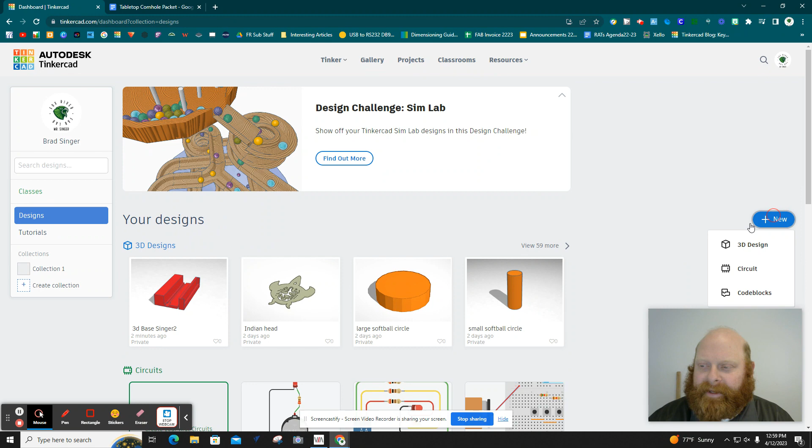So let's go ahead and click on Tinkercad. We're going to go to Designs, and I'm going to click New 3D Design. Then what I'm going to want you to do is make sure everything is set up correctly. I'm going to move myself out of the way here. We're going to change the weird name that it gives us, and we're going to say Tabletop Cornhole Set, and then your last name.

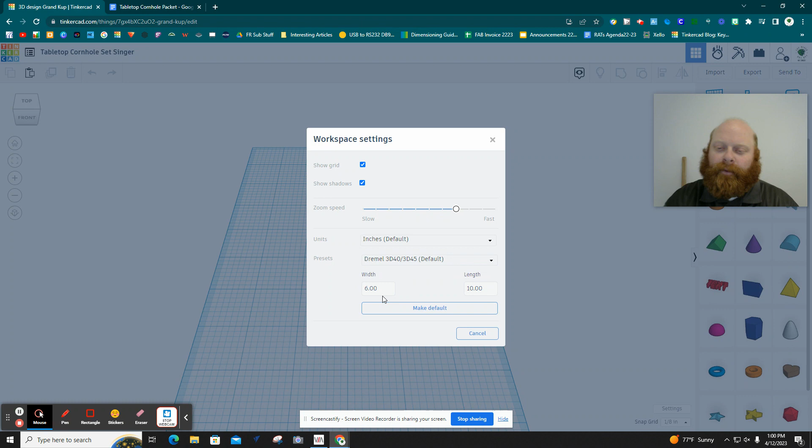Next, we're going to go to settings. I have everything already set this way, but you're going to have to change it probably. Change units to inches, change presets to Dremel 3D40 and 3D45, and then click Make Default. When you click off the screen, it will look like this. And then make sure our snap grid is at 1/8 of an inch.

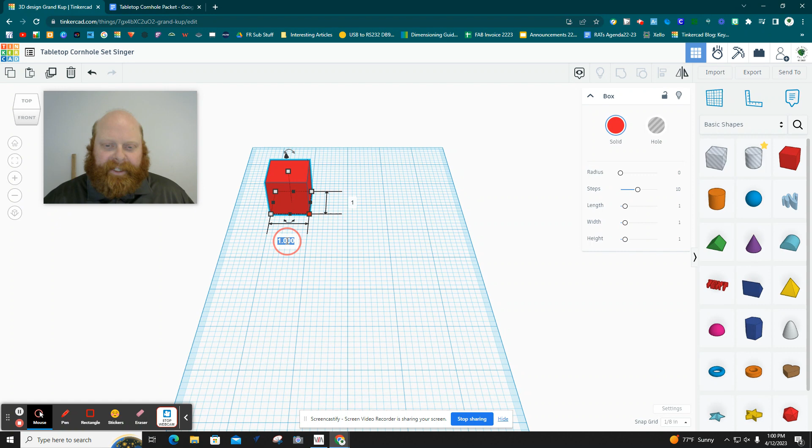Okay, I'm going to move my camera over a little bit. First thing we're going to do is make the tops. These are going to be exactly the same dimensions as the wood you're going to use. So I'm going to click in the little node, bottom node corner here, and we're going to make the dimensions match our top piece, which is 6 by 8. I'll click the little node, click this button, type 6 on the keyboard, click Tab, click 8, then Enter. This will make a nice long piece for us.

It defaults to 1 inch tall, but we want 1/8 of an inch - that's how thick our plywood is going to be. 1/8 as a decimal is 0.125. There we go.

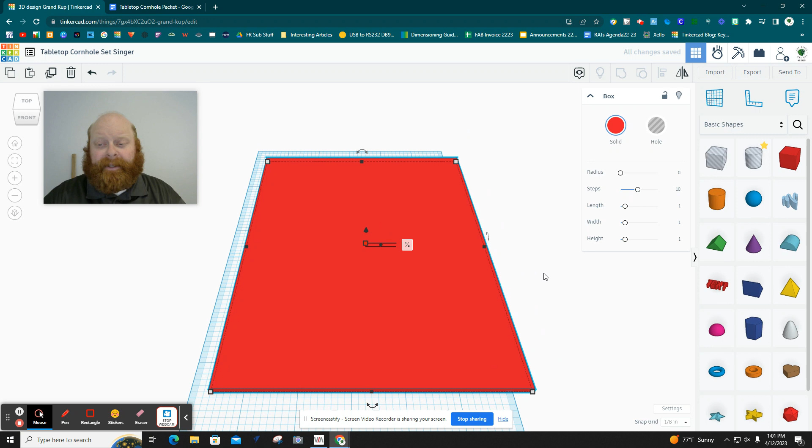Nice flat piece. For the cornhole, you take the bags and toss them right into the hole. So what we need to do is make a hole. We're going to bring the cylinder out. It doesn't matter where you put it, just as long as it's somewhere on the red piece that you made. Speaking of red, let's say I want to change that color.

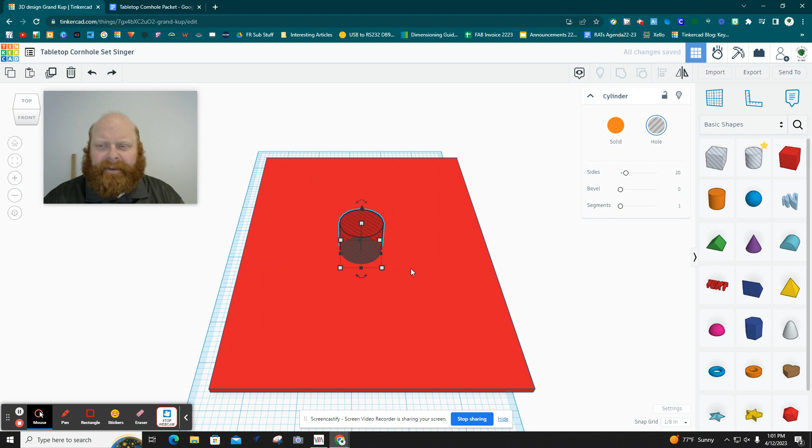I want to go ahead and change it to green. I like green better. So it doesn't matter, I just like to change those every now and then.

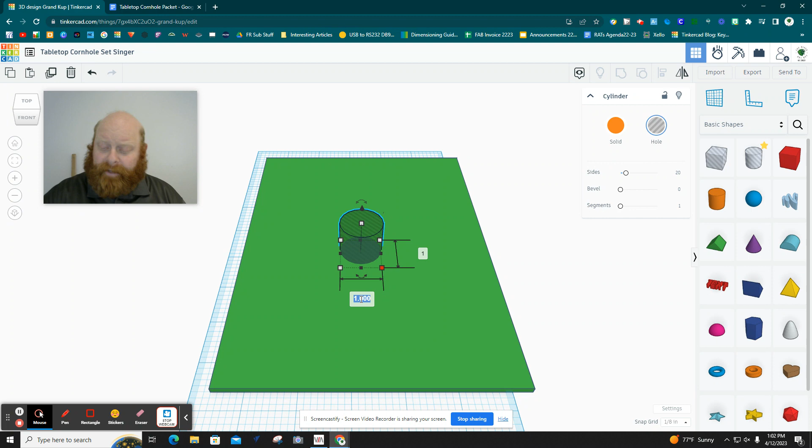Okay, we're going to go to our nodes. For our nodes, we're going to want to make our hole a diameter of 3.25 inch wide. Actually, let's do 3.5, okay, so it's easier math. So 3.5, click Tab, and 3.5, and click Enter. That's our hole - that's how big the hole is going to be.

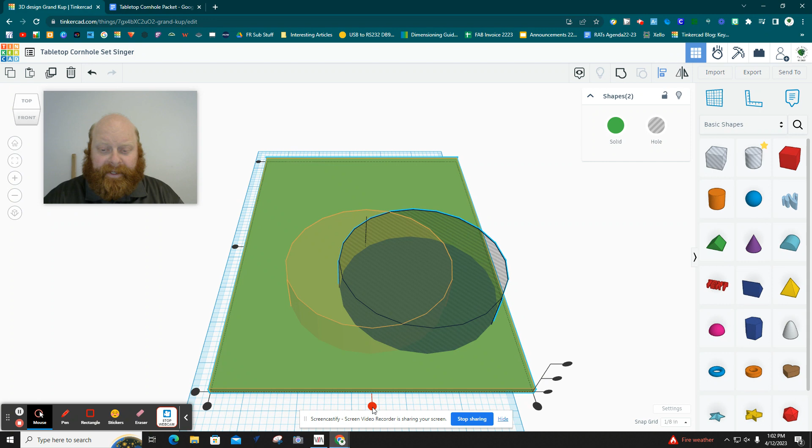It doesn't matter where it's located because we're going to use an align button. So we're going to highlight with our mouse the two pieces, and click L on the keyboard. Now you see these little dots. Let's pick the center one so it centers the hole, and then pick this back one so it sets the hole all the way - let me zoom back out - all the way to the back of our board. We'll click on top. Okay, so we can click off.

Now what we're going to do is move that hole down an inch. Here's how we do that so we know it's precise. Down here, the snap grid says 1/8 of an inch, so what that means is we're going to need to move this eight eighths to make one inch.

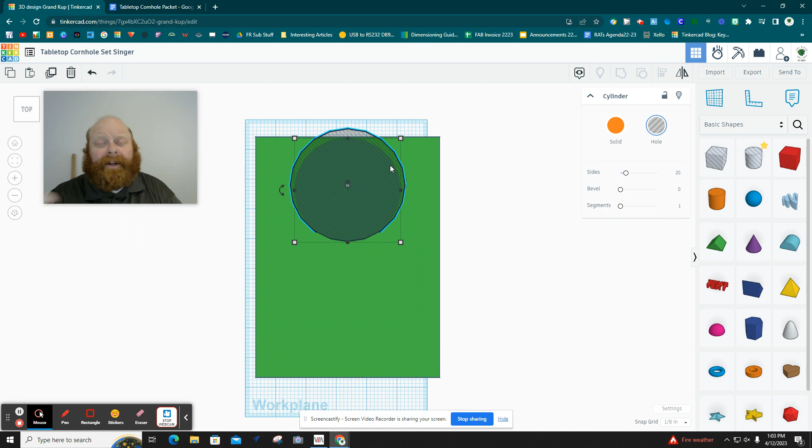Our denominator is 8 in the fraction, so that's how many times we have to use the numerator to get an inch, so that's 8 times. We're going to click the arrow down 8 times. 1, 2, 3, 4, 5, 6, 7, 8.

Now our hole is centered. It's down 1 inch, exactly where we want it to be. So what we need to do is cut this hole out.

So we're going to group it. That's how you do that with the CAD program. We highlight both parts, and we're going to either click this button here that says group, or you can do Control G on your keyboard, and there you go.

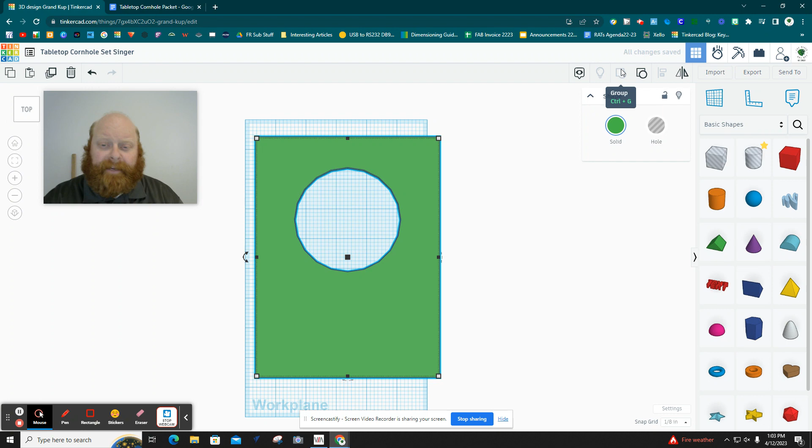There's our hole. If we check our dimensions, we can click in the corner. We'll see here if I do it at an angle, 6 inches, 8 inches, and 1/4 of an inch tall. Perfect. Now we've got to make the base.

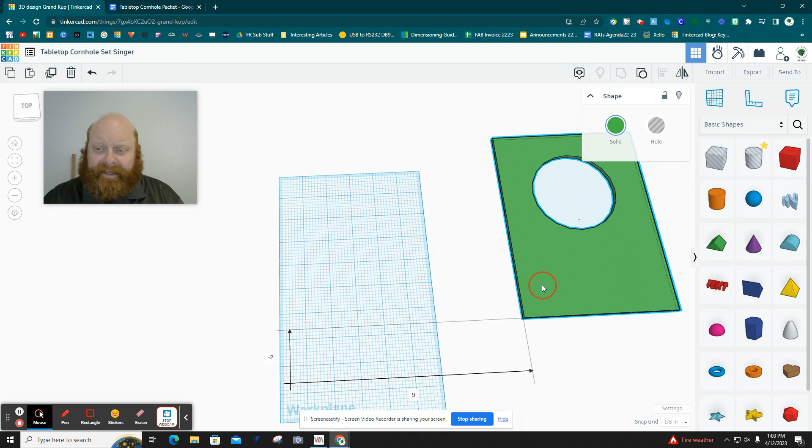So I'm going to slide the top off to the side. When we look at the base, let's start with the back piece. It's 6 inches long, 2.5 inches tall, and the wood we're going to be using is 1/2 inch thick.

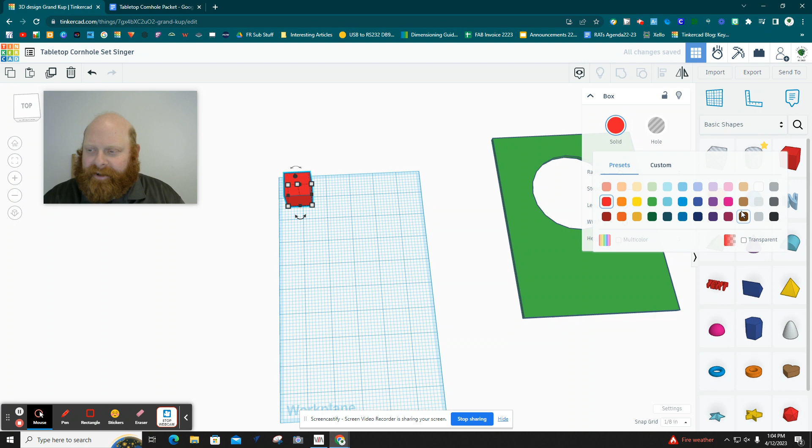So I'm going to grab a box and pull it out here. I'm going to change the color to black — actually, I'll do brown, because it's going to be like a brown stain color anyway for the wood. So we're going to use that.

We're going to click in the front node and start putting in the dimensions: 6 for the length, tab, 0.5 for the thickness of the wood, and enter. Then remember the height, as we said, is 2.5 inches.

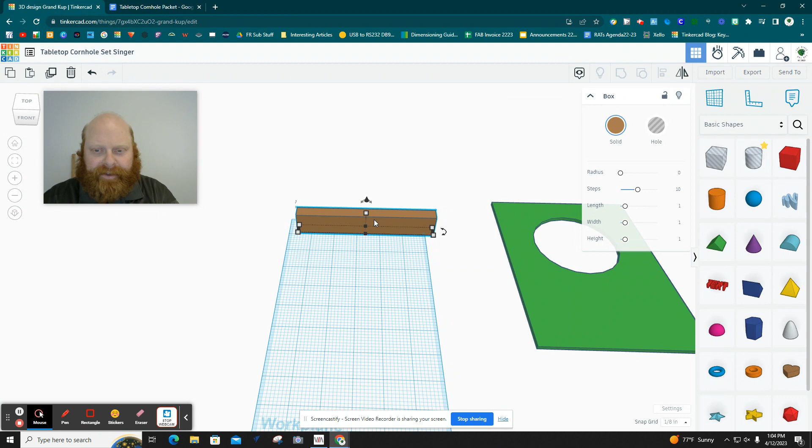We're going to click on this node and change it to 2.5. And there we go — everyone goes, wow, that looks really tall. Well, that's what 2.5 inches looks like on this computer program. So that gives us our back piece.

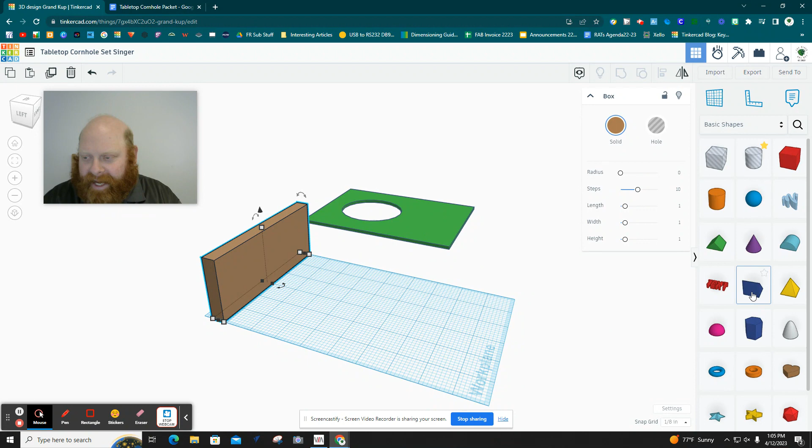Now the next thing we have to do is make these side pieces. For that, we're going to use a wedge piece, which is this blue piece here. I'm going to bring that blue piece out and put it right on the edge and in the corner.

I do that because these are eventually going to be connected together. So I'm going to back it up with the arrows so that it's right against it like that. The other thing I'm going to do is change the color so it matches.

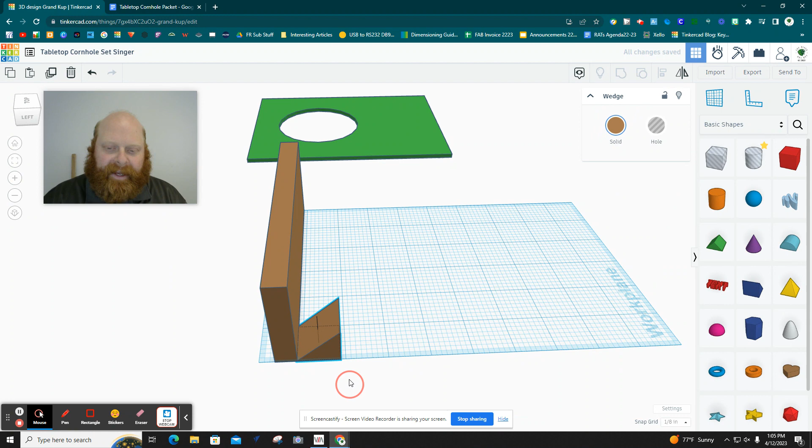Now, when you look at this triangle, you're going, well, Mr. Singer, that looks like it's flipped the wrong way. And you are correct. So click on that triangle, and we're going to show you another button up here, which is the mirror button. For the mirror button, you click on that, and then you get these arrows.

If you click on the arrows, you can see what happens. If I click on this one, you can see that it flips the wedge piece, which is exactly what we want. So if I click off now, it's set perfectly.

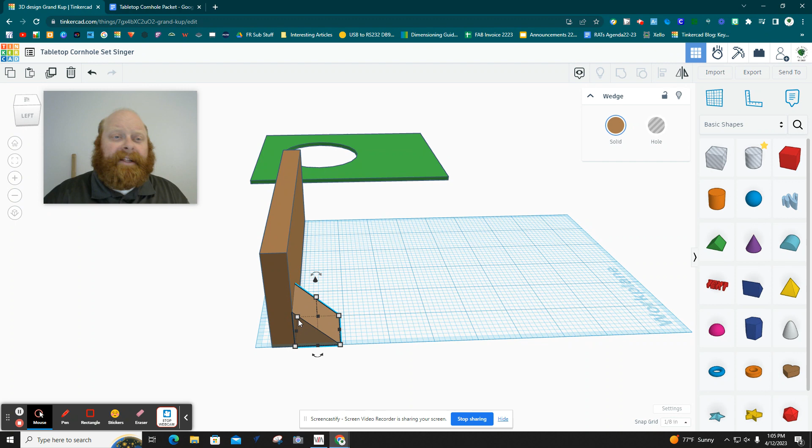That's what we want. So let's click on it, and now let's set the dimensions. I'm going to click the top node first. Remember that the height of our wood is 2.5 inches. If I hit enter, it stretches it out.

Now I'm going to click the bottom node. Remember, we're going to be cutting these to 8.5 inches long. Tab. Remember, it's 1/2 inch thick wood. Enter. And as you can see, the side piece slid in a little bit.

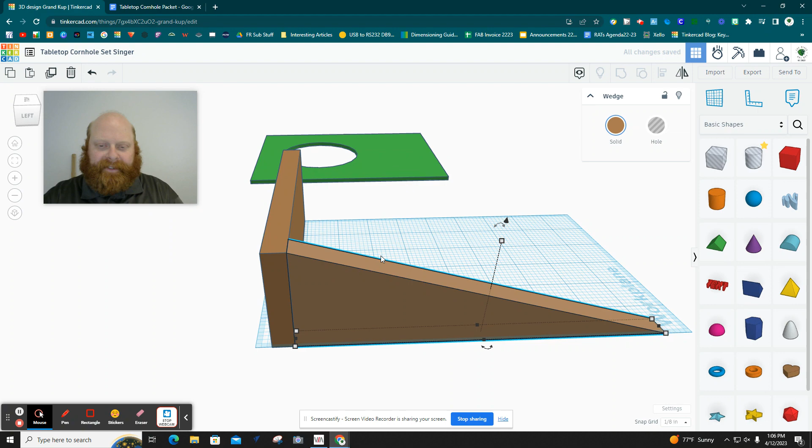So all we have to do is just click on that piece, and we can use our arrows to click back until it's perfectly aligned on the corner. Now, we have to do this to both sides.

So instead of making another wedge piece, let's just click on this wedge piece and do Control C for copy, Control V for paste, and then we just use the arrows to slide it over right into place.

Pretty easy. Now, before we do anything with the top and the sides to mesh them together into one piece, let's go ahead and highlight a box around the 3 pieces that we have here, and let's group them.

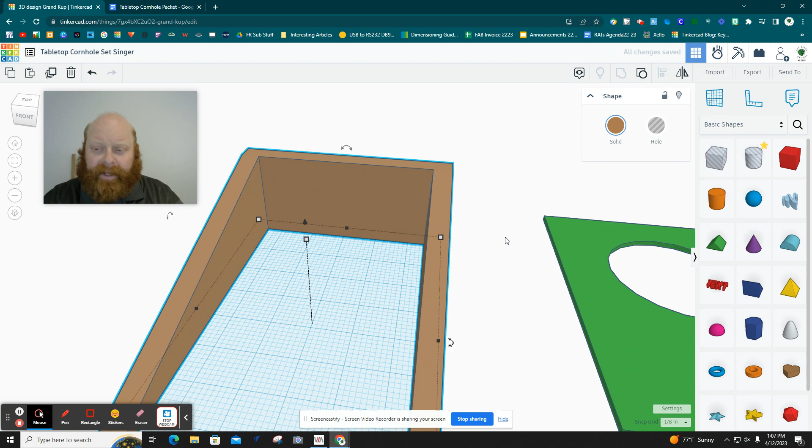So you can either click again this button that says group or Control G, and there we go. So now we have 2 separate pieces that we're eventually going to make one today. So I'm going to slide the top piece over, and I'm just going to lay it in this section. What we want to do is we want to align this perfectly. So again, we're going to highlight both pieces, and we're going to use that L button again for align.

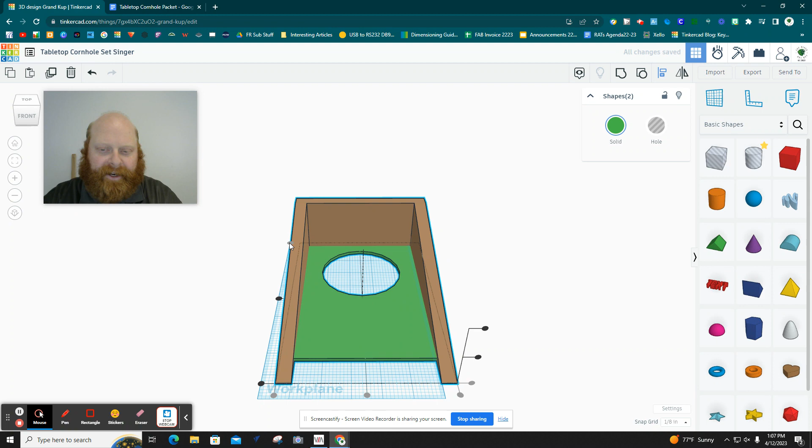Now, if I zoom out, I want to center these so that both pieces are centered. And I'm going to click this back node. And when I do that, what it does is it lines up the base with the back piece. And that's how it looks from the bottom side. But what we want to do is we want to drag this, our cornhole piece, the flat end, up and at an angle. Okay. So it looks like it's going to be tricky, but if you follow along here, you'll see it's really not too hard.

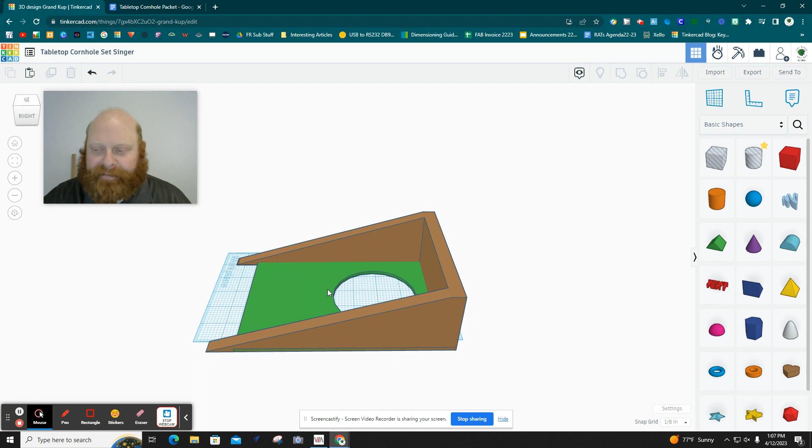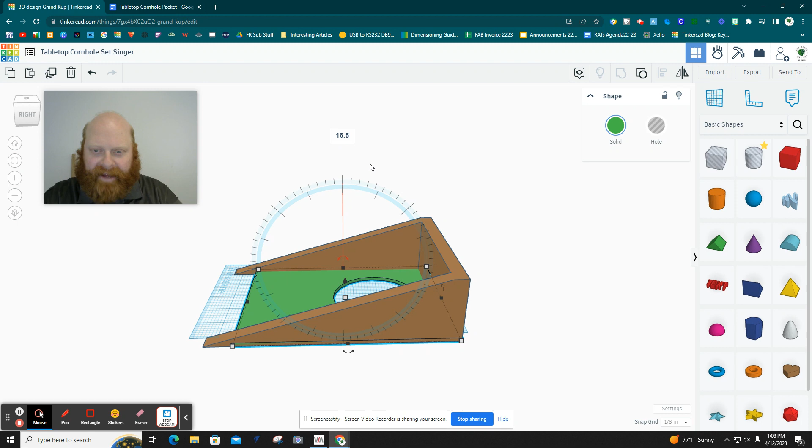So I'm going to click on that top piece. And you see that there's these like compasses when you click on them. So what we want is we want this compass that allows it to go left and right. So if I click on that, I can then go click on that number, and you're going to put in 16.5, hit enter, and it's going to tilt up. If for some reason it tilted the other way, you would do negative 16.5. And if you're stuck on that, just see Mr. Harris or myself.

Now all we have to do is take this black triangle node, and you click on it with your mouse, and you slide it up till it's sitting right on top of the base that we made. You see that? Now you can see that it's got a little of a gap to the back, so you can just click an arrow back one time, and now it's good. When we make it out of actual physical wood, Mr. Harris and I have a trick to show you how you don't get that gap. But for now, we just need the sketch for the orthographic sketch, and this works perfectly.

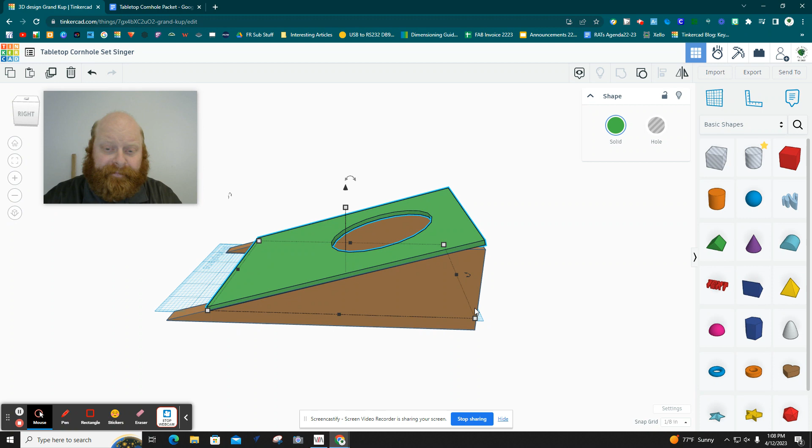So if I turn this to the side, you can see what it looks like. We forgot, though, that we also need to group it. So highlight it, and then Control G to group it. Oh, now it all turned to one color. Well, if we don't like that, it's really easy what to do. We're going to click here where it says solid and click multicolor. And there we go. Last step, you're probably looking at this going, well, now we got these weird pointy pieces on the end. That's correct. So there's an easy way to fix that.

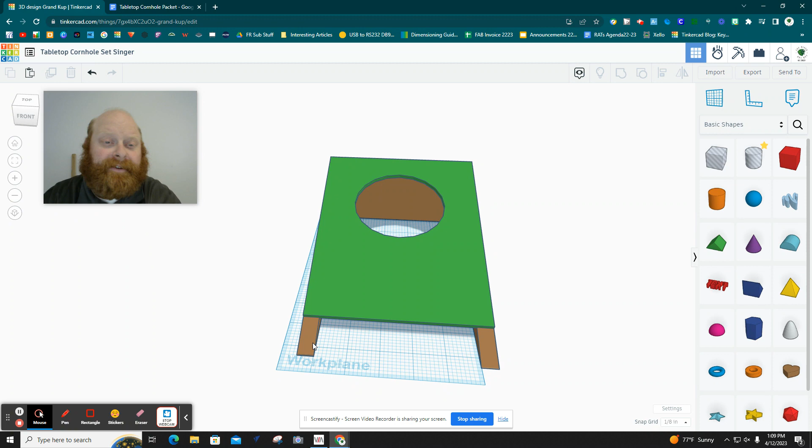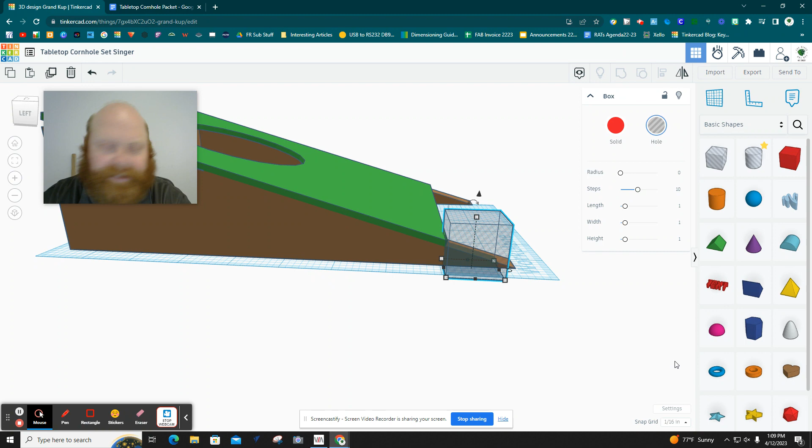We're going to take one of these boxes that's a hole, and we're going to align it with the chunk that's hanging out and make sure it goes right to the edge of that base piece. You see how I went a little too far here? So I'll just use the arrows till it lines up. And it can be a little bit cut off. It's no big deal. You can also go to the snap grid and make it a little smaller so you can be more precise. So now that I got that, I'm going to click the little node and I'm just going to drag it so it's wide enough that it covers both of the triangles, and it doesn't matter if it's got extra gap at all.

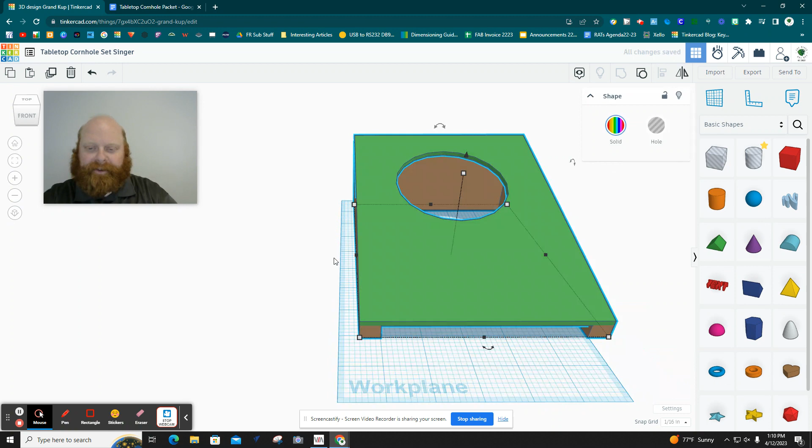And now the last thing to cut that off is we do Control A, so we highlight everything, Control G to group it, and there we go. It cuts it off. So then you're going to do screenshots of this to put it into your orthographic sketch, so you're all done.

If you got any questions, you can go ahead and see Mr. Harris or myself. And actually, I can show you how to do a screenshot real quick. You know what? Don't worry about that. We'll show you how to do that in class once you got this done.